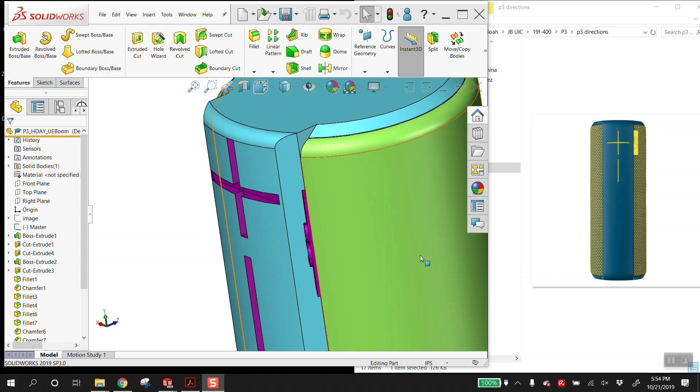Cool. Pressing questions? None too much. I'm still working on certain aspects of it.

I was wondering, do I need to render the features on the top and the bottom if they're not going to be shown in the photo? Nope, you only need to build what's visible here.

So then I started this, which is my theoretical redesign. This is what I was thinking, like a candle mug, a travel coffee mug. I'm not quite sure if I'm super happy with it yet.

Part of me thinks it needs to get cut in half because I feel like it's too much.

This is what I have in two shots. That's looking great. But technically the fabric, I can't find a cross fabric that comes at an angle so far. You could rotate the angle in Photoshop, but looking at this image and what you have there, I think it's okay.

I think this is an illusion, like a diagonal aspect of it. I think you're all right. I would try and get...

That's looking pretty good. The problem is every time I render it, something's off and I can't figure it out yet. But it's okay, I'm still working on it.

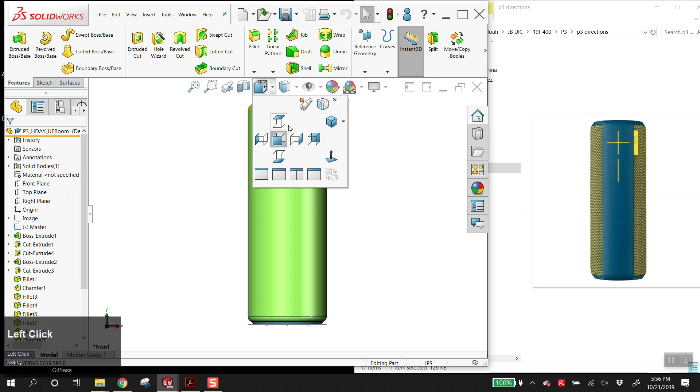How did you build this? So there might be a very simple way to get rid of it. Let's see if we can figure that out. Or would you prefer I not invest time in that?

No, that's okay, that's good. It's the little things that start to evade me. So you know what, I see this now.

So you got a chamfer there. What happens if you just simply select this as a chamfer too? Oh okay, it's fine.

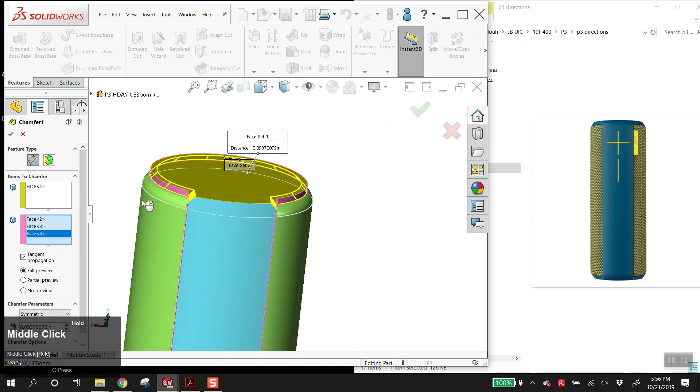There you go, just do that. Perfect, let's see now how it rebuilds, and I can talk and let you know exactly what it is that I did. Let's see, does this chamfer rebuild? That looks a bit funny, but you might be able to just simply throw a fillet on here.

I would... okay, maybe you do this already. Do you cut and mirror it at some point?

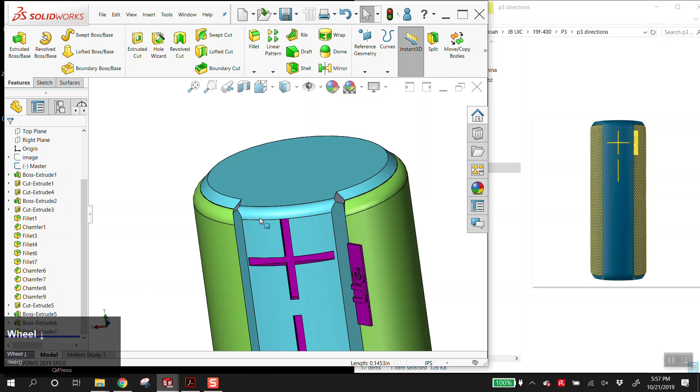You know, in theory, this would be better built in half because you don't have to do all these things twice. I'm probably going to take off some points for that. It's up to you whether it's worth it to go back and change that or not.

I'd have to go back and watch your video. I'm not sure I have a full understanding of that.

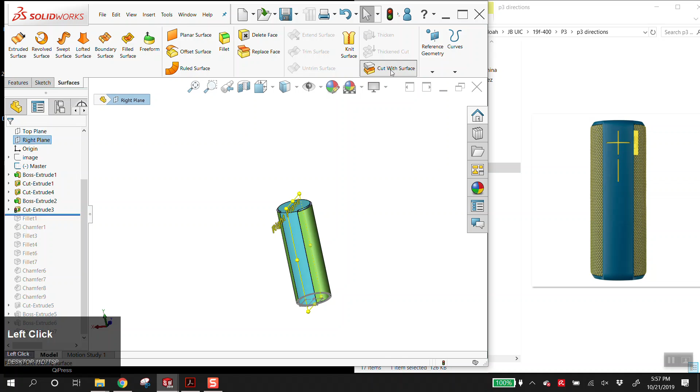Simply, one simple way you could do it would be, before you start applying fillets and stuff, you could simply go to the right plane, surfaces, and say cut with surface. Blow away the left side.

Now here, all of your fillets and stuff, in theory there's less to select, but mainly it's for this top portion. Because now when you get this chamfer, when you fillet this out, you only have to worry about it once.

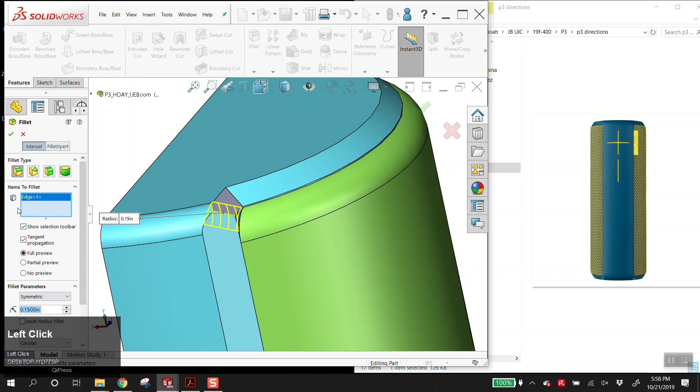I'll be honest, it's kind of nitpicky, but it's all in the name of giving you best habits and best practices. That's fair.

This is a bit wonky, but hopefully it doesn't come through in the render. You should be able to let most of this rebuild, and you simply just at the very end take the right plane and say mirror, then just select the bodies one at a time.

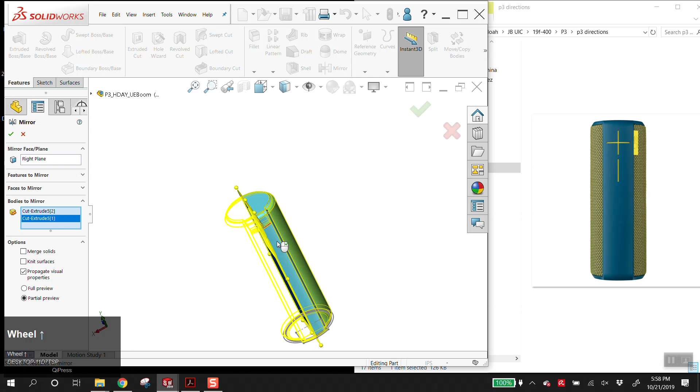I just feel it's my due diligence, checking this to let you know where you might lose points. It's your decision whether it's worth it or not. You may not care, and honestly, in the grand scheme of things, it may not matter.

You should know, at the high grade right now it's going to be a fraction of a point. It adds up, but you can determine whether it's worth that effort to make up. But basically, you can just do what I did, and again, hopefully this records.

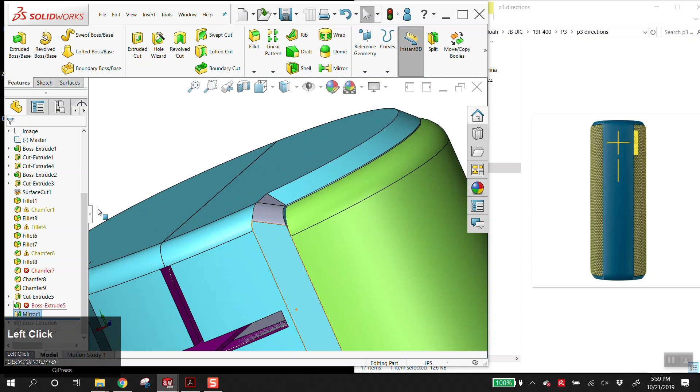So I think the main thing that we started down this path for is that in this chamfer command, if you simply select these faces here. Originally, you didn't have this face selected, so it only chamfers there.

If you simply add this face to the selection, it just turns it, and that will get rid of that point in your render.

Yeah, the texture you might just play in Keyshot with it, making it a bit smaller. I don't know, but it also looks all right. I don't know, it's your judgment. I guess I'm picking up on you saying some of the things looked a bit off, and that's what I'm picking up on.

The other thing is this is like a silicone material, but when I use the silicone materials we have in here, it doesn't look right. This is right now a paint material, and it's too shiny. So then I changed it to plastic, but it still comes out wrong because silicone is like a matte looking material.

So here's what I would recommend. Click on materials here, expand plastic, and select rough plastic, or click soft and use that kind of plastic. Maybe like soft blue or anything, since you can change the color, and drag that over. This even applies almost like a fuzziness to it.

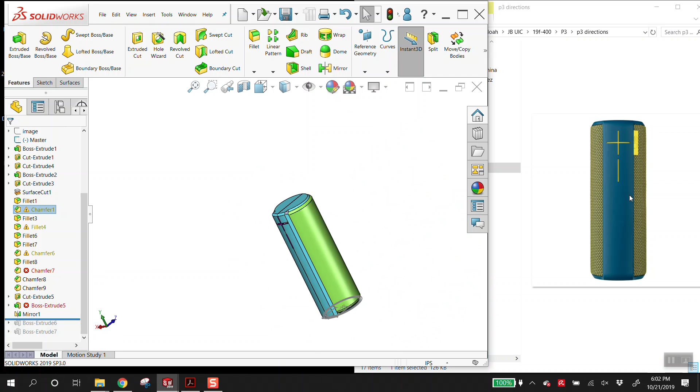And if I look at these two right now, your plus looks a little too high. Yeah, I just noticed that when I was looking at it. I also noticed it's too wide - it looks like it's touching the edges, and it shouldn't touch the edges.

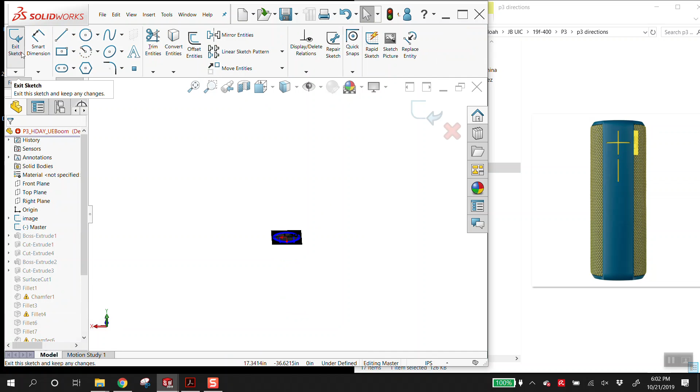Do you have this photo in here? I thought I did, yeah. Oh no, you know what the photo is? No, the photo is on the top view. That's how I started. I would get this photo in there and just literally trace it. Okay, that's fair. And that'll get you the plus shape.

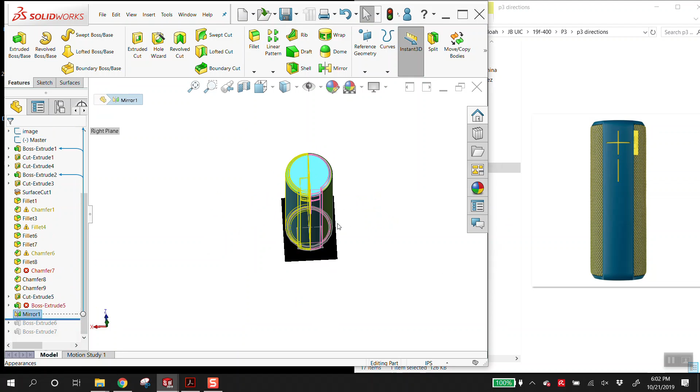Master looks good. Any other questions? You have the last question time or something. I felt pretty good about it this weekend, I worked a lot to get it pretty close. Okay, I think you're in good shape.

Looking at your coffee mug, I might just say maybe the handle doesn't go all the way down - maybe look at it just stopping higher up, and put some generous fillets on the inside so it looks soft. I also thought about cutting it in half, so it's only like a half handle, like the handle you did on the toaster, so that it has the illusion of a whole line.

If you do the half handle, please just terminate the handle better. Your toaster is great, but just put giant fillets on this. Okay, I will. Cool, all right, nice work.

Do you want to skip? I haven't been asking this - I went and did a couple other ideas, and then this is what the original was. Okay, that's cool, you're good.

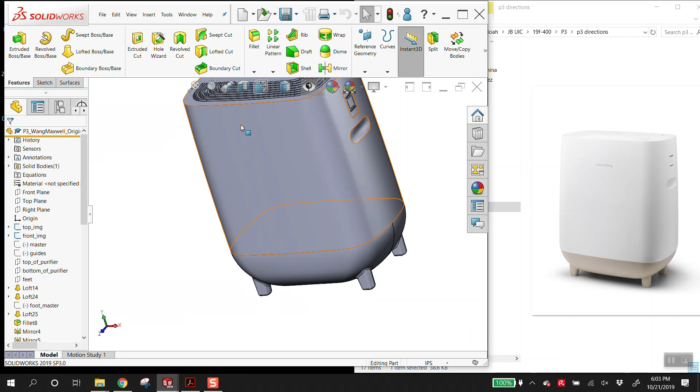Oh yeah, let me address that. You're absolutely right, I apologize. I told you to do the cut, and you're right that it should be the extrusion because the cut varies in thickness, the extrusion doesn't.

I happened to be talking to my mentor the same day, and he was walking me through it. He thought of something: the grill is actually the same size, so you don't have to worry about the non-concentric circles. I did it manually by hand, obviously, because they're still not perfect, but it looks good.

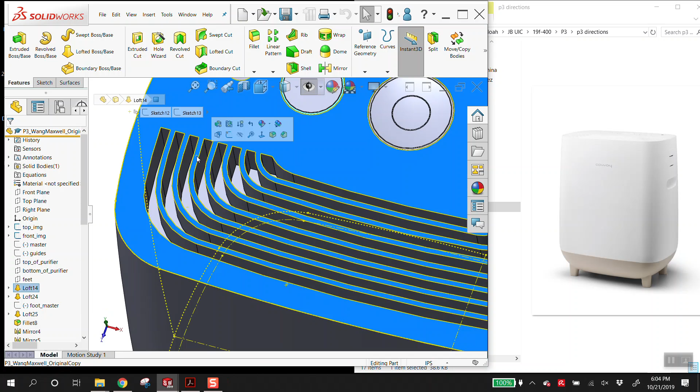I realized after I turned this in that I missed every single split line on the whole thing. So I've gone back, and this is now me splitting and combining every single face to create the lids and split lines.

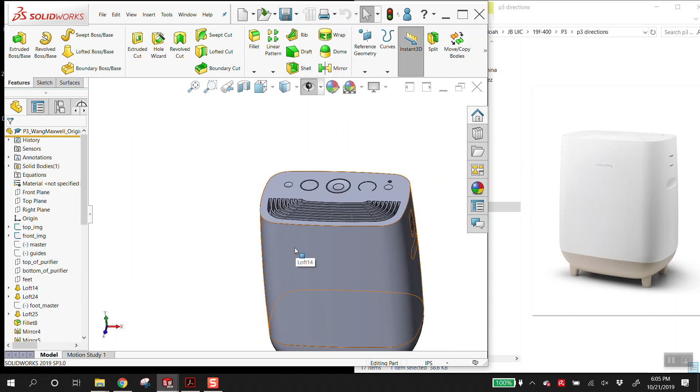That's okay, I think I see what you're saying. Since in the original image I realized this is the one I'm copying, you can still see there's a split line there. So where are you doing that then?

I don't understand why you're doing combine though, that's what's confusing me. I have to make it - I split it, so I made an inside and an outside. I made a shell and then used the shell, copied it, and cut the original from the shell. So the original is now the shell minus.

I understand - so you copy the body, you shell it, you do a combined subtraction to get the smaller one. And I keep a copy of the shell to keep the same functionality. That's cool, that's a good workaround. Then I cut with planes and lines I drew myself, and the combination now is also... that's weird.

Oh, see, I'm running into the inner body. I think I'm gonna end up just cutting the inner body right here, leaving just a little bit of the inner body for the underneath. Since from the top it looks like this, but I don't need this.

No you don't, and this little bit, there's a hole there, so I'm just gonna cut this here. That's fine. So right now all the combination is me recombining the halves back together to create this shape that doesn't have a split down the middle.

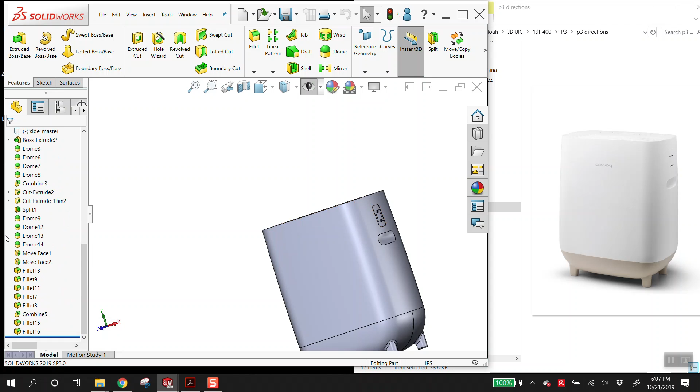Let's look at it here. Pinching is the issue I'm having with domes. Yeah, domes are not perfect. It's slightly better on that one, but I think on this one, because of multiple splits and multiple combinations, it's less perfect.

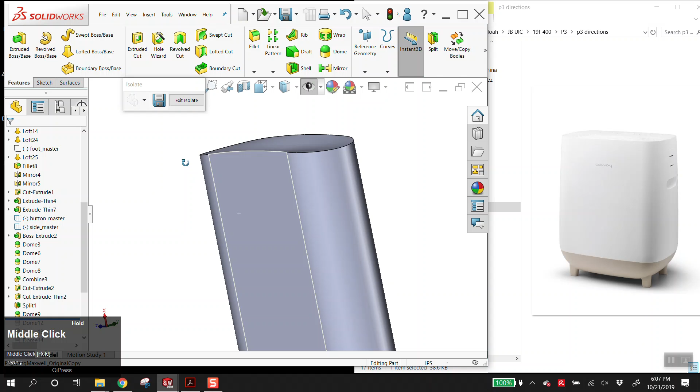On that one it seems to be working a lot better. Yeah, so here's this one - you did the dome right, because you want a dome on a body that's like this, where it's exactly this is the edge. If you have a split line, it keeps the dome more gentle.

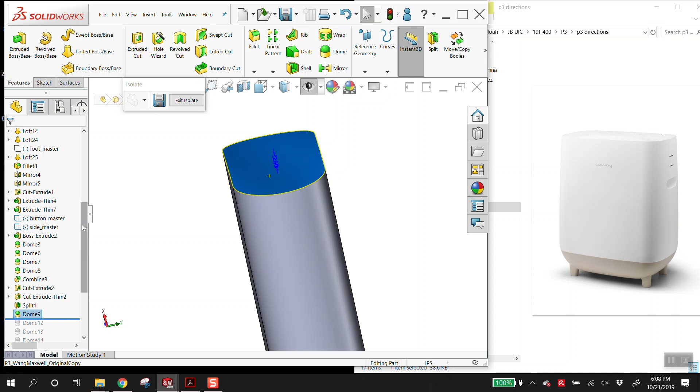So how did you do it? Can we roll back to where you did the dome on this one? Because if you did it on a split line, it's going to make it soft like it is on this one currently. So do me a favor, right click on this button and go to isolate. Okay, and now edit the dome feature.

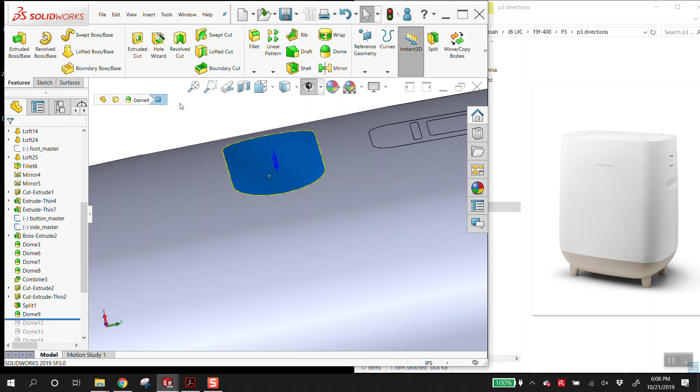So if you want, do you want to spend time on this? I can show you how to make this beautiful.

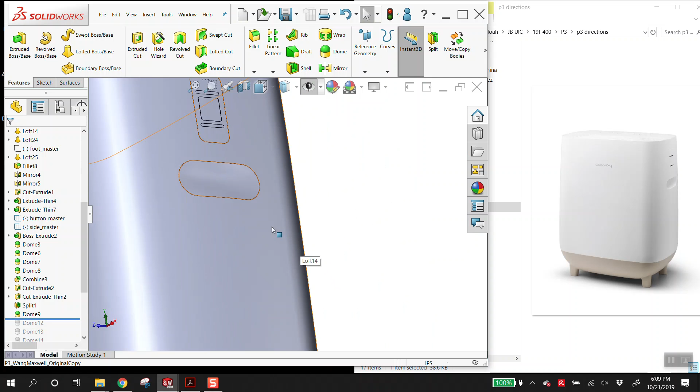Are you gonna use surfaces? Yeah, surfacing. Now, if you don't want to spend time on it, honestly, the dome's probably fine. I don't think it's going to kill it. It looks better here for some reason, I don't know why. It's pinching. Before it didn't pinch, and now it's pinching. I can't really tell, the only difference I can perceive is that this one is longer and this one is shorter.

So if you simply just, well, you could go to move face here. I use move face to make it. So just make it way longer and see if that fixes it. But I'll be honest, I don't know if it will.

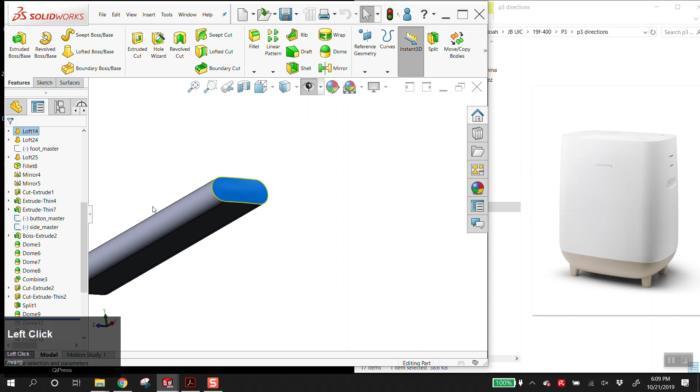Oh, now it broke. What is this here? Did not seem to help. Is it better? It's slightly better, it's slightly better.

Let's see if there's a quick fix here. Again, let me know if this is where you want to spend your time. You have 2 minutes left. Oh, I mean, I'm happy to. I want you to be aware of it though.

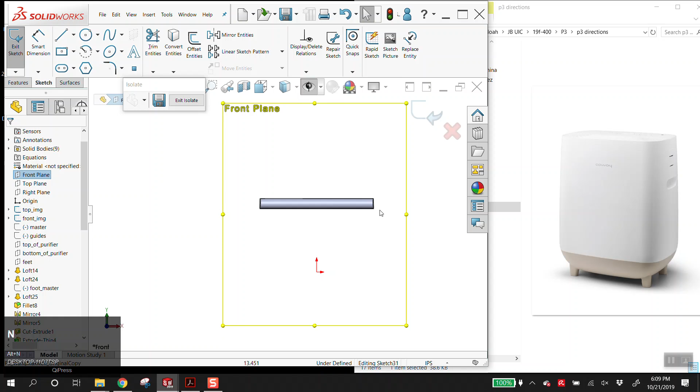Okay, can we move on? Yeah, we can move on. Alright, I'm gonna open P3 for just a second. I'm going to just talk about it while you do that.

You could try to create a sketch on the front plane that's an arc here, and in the dome, see it. I'm not sure if this will work, but you can try and select one of these here, and it might guide it.

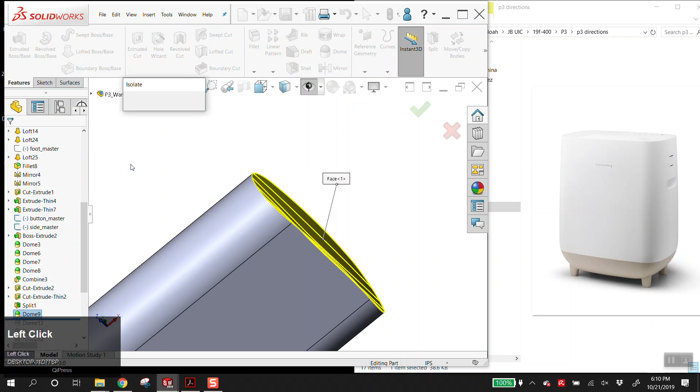But honestly, it's fine, it should still look good. Like test. And so that was what I had originally without all the splits. Okay, that's the original, yeah.

Is that not close? Oh, in the setup? Yeah. Is it not like... I couldn't get it. It looks close to me. Is that close enough for the class, for the project?

Here, hide it again. Show it again. It's like slightly taller. It feels slightly taller. You can go to camera here.

Have you played with field of view? I max out perspective, so when I shrink it, it goes even wonkier. It becomes like, okay, it becomes completely not right.

Yeah, it looks like we see more in the view. I don't know why we're able to see such an almost isometric, but also not isometric view. I don't know how to explain this view, but it's weirdly isometric.

I mean, some of the stuff you can do is just literally cut the top if it's looking tall. Just change your master sketch and make it a half inch shorter.

But yeah, I mean, you're absolutely right, you're playing with the camera focal length. You might be able to play with field of view.

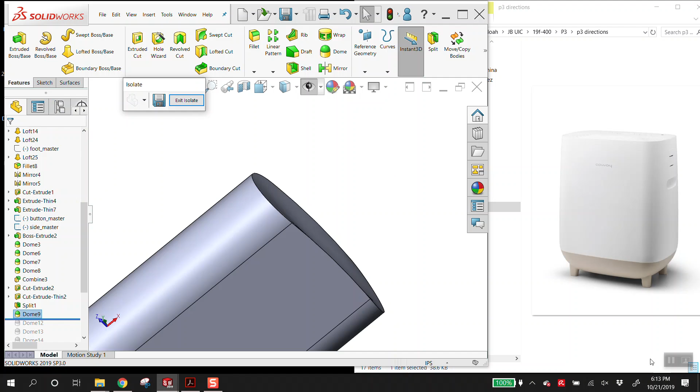Okay, cool, nice. All right, stop your time. Do you have any pressing questions?

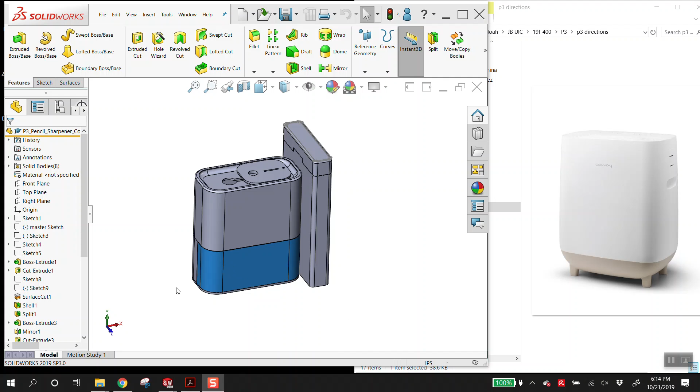Okay, we can talk about Keyshot on your computer then. That's fine, because I did a test run here, and I see that if you take that here, it will show up. Okay, so I don't know how to fix that. So you're saying down here.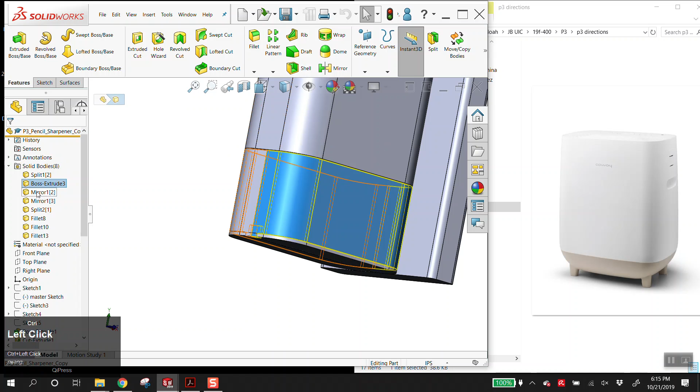Firstly, off the bat, I can see in SolidWorks, is this file what's there? Yeah, I think firstly in SolidWorks you want to combine these two. So you want to take this and hit combine to make it into one body, and hopefully that will get rid of this split line in the middle. Do you see that? Yeah.

Again, with what I just showed, you should be able to, if it's the same file name, make that change and go into Keyshot, say import, and say replace geometry, and it should keep the materials. Does that make sense? Now let me pull this up here.

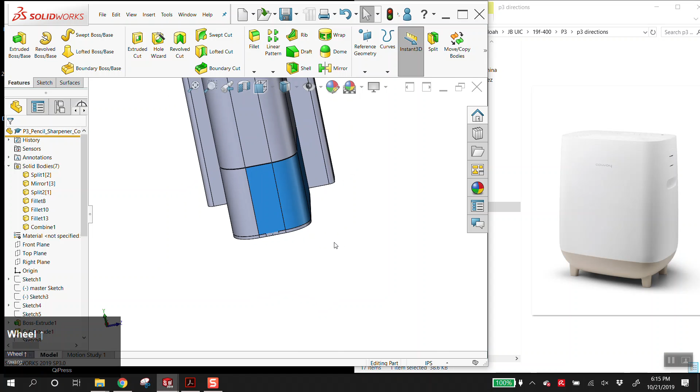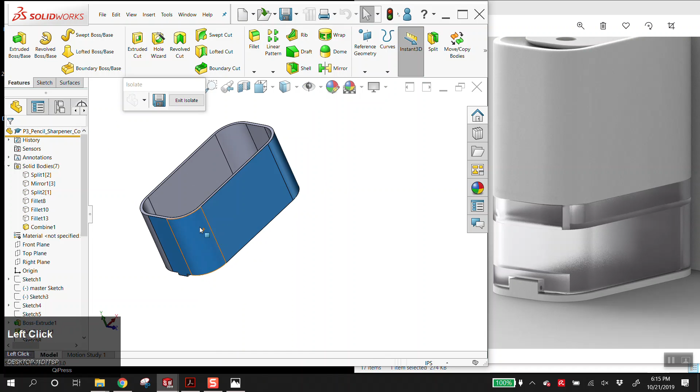All right, so let's look at this. I know, don't worry, I'm happy to look at that there. Okay, you did this as a shell, that's okay. What material did you apply to this?

Yes, so let's go — do you have Keyshot open? Let's look at your material options. So I would go to see — is there? I might look at glass, and actually expand the glass there, and select solid glass actually.

And is one of these frosted? No, click on frosted. I would pick this one. I would try that one.

And I think that's going to — if we look here and those shadows that are forming here — I mean, I know your poor computer is asking it to refract everything, but that's my best advice: that line in the middle is happening because they're not combined. So combining it, like I just showed you here in SolidWorks, will help.

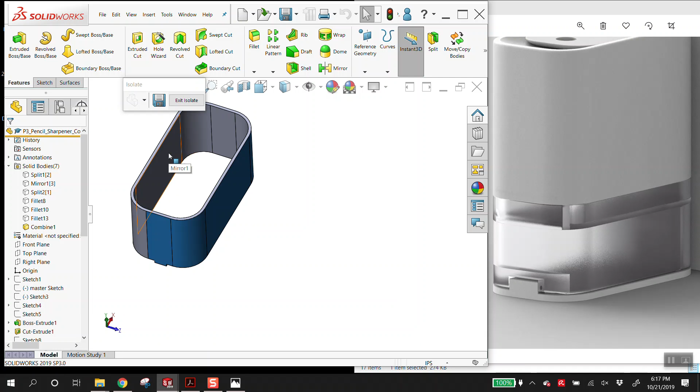The other thing you could try if you're still having trouble is not shelling this. Let's see how you built this. Yeah, it's just simply suppressing the shell command, and as a complete solid it might render a little bit darker.

But actually, you see how what that's looking like and what this is looking like? Is that answering your question? Is that kind of your goal?

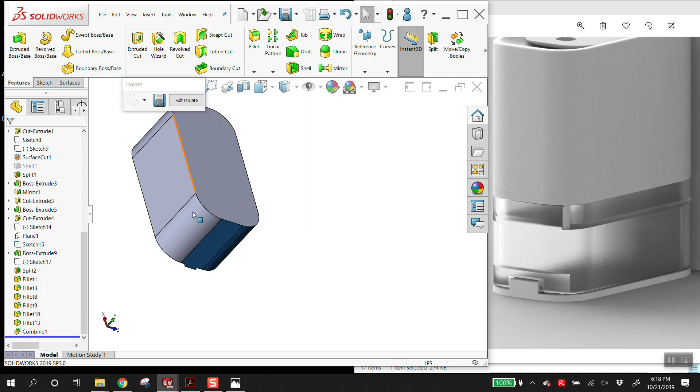Oh, down in here, okay, I'm sorry. Okay, sorry, I apologize, I misunderstood you.

Well, okay, if we look at how you built this here, this is going the wrong way. You see how this jumps up? So let's roll back through here. I'm sorry, I misunderstood you.

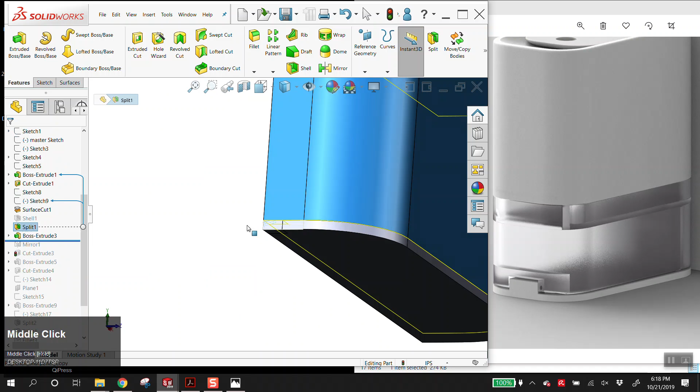All right, so you split this on the side — that makes sense, I'm assuming, yeah, that's cool. So this extrusion here, you got to fix this in CAD. So I would edit this.

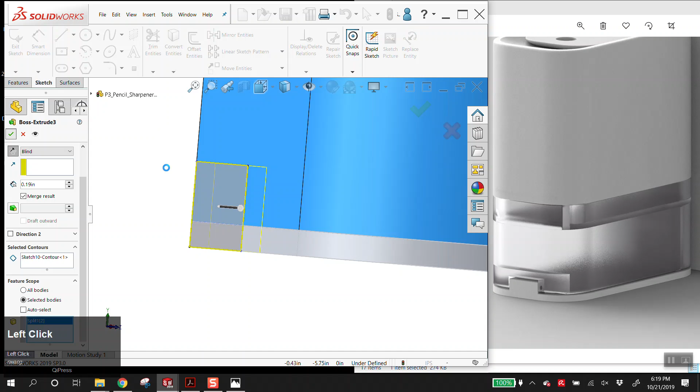Okay, that's cool. What you have to change here is where, in feature scope, selected bodies, it's going to the wrong one. So right click here and set clear selections. I'm sorry, it's covered by my thing here. But in here, you want to select the base, because right, it's part of the base. And then click check, and now it comes up.

And now in this view, same — let's see, where did you make this sketch? It's on — is it on a face? You could simply select this face again and hit Alt S, select a sketch, and say convert entities.

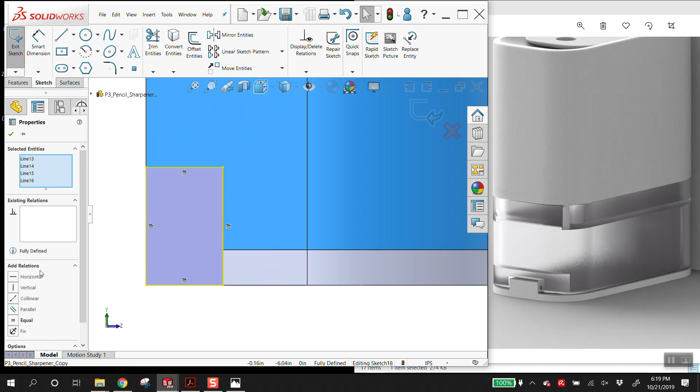But you know what, you actually want it to be a bit bigger because there's a gap in here. So I'm going to set this to for construction, and I'm going to say offset, and maybe like 0.01, maybe a bit bigger, 0.02. Click check. Now here I'm simply going to say extrude cut.

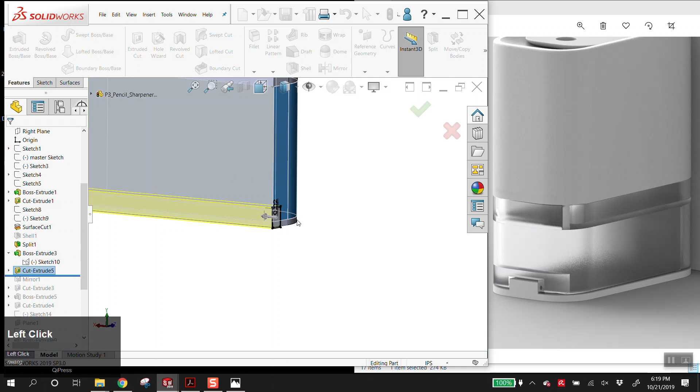And here say through all, and select this. And now there's that gap in there, which is going to match this. So basically you just got to get your details right. And then obviously this should not be the same here.

Cool, does that make sense? So you just — I think you just had the wrong body combined with this, and you just need to make those changes. Again, it's recorded, so hopefully you can go back and refer.

You still have 2 minutes. What other questions do you have?

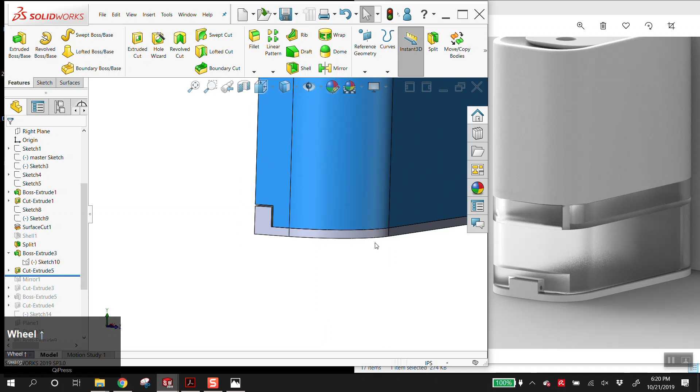I feel like I don't know if I should change it because it looks much smoother. Okay, agreed. And this one kind of looks like actually, so the top part, I'm okay with this. If you want to make it smoother, you should be able to just blow this out. It's okay to just have it go way big.

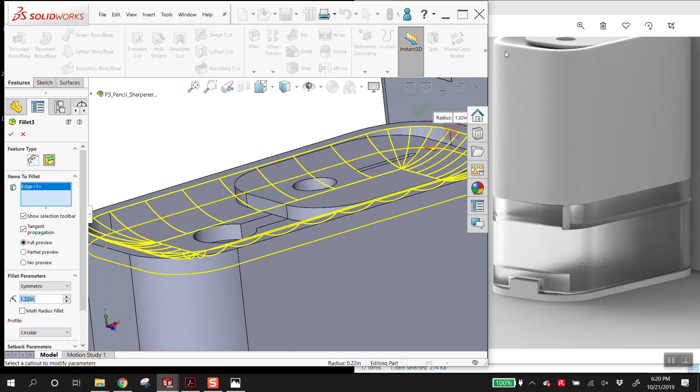And have the fillet come up. So that's up to you, you can change that if you want. My honest answer is I think you're pretty close. The one that I think you want to blow out is this one, because this thickness here.

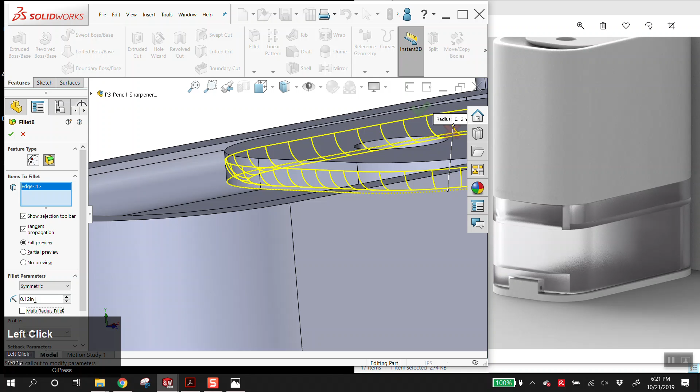You see how this comes almost to a point. So I would definitely edit this fillet, and I would make this one bigger. I'd make this one like... I'd probably do that.

That looks more real to me. Also, this looks more forward. So you can simply take, I don't know how, where you built this, but you can simply use this tool, select this, and just slide it forward a bit. And just make sure you don't check copy because you don't want the...

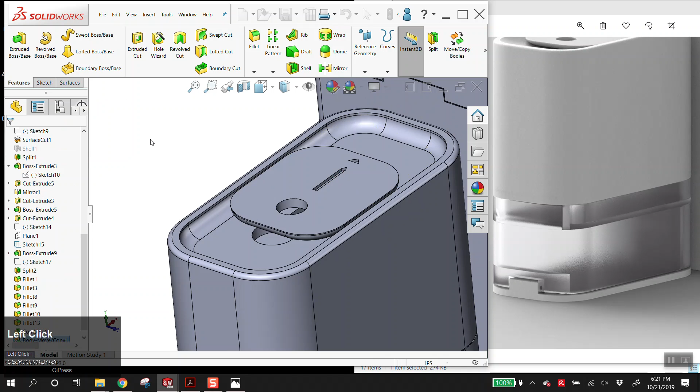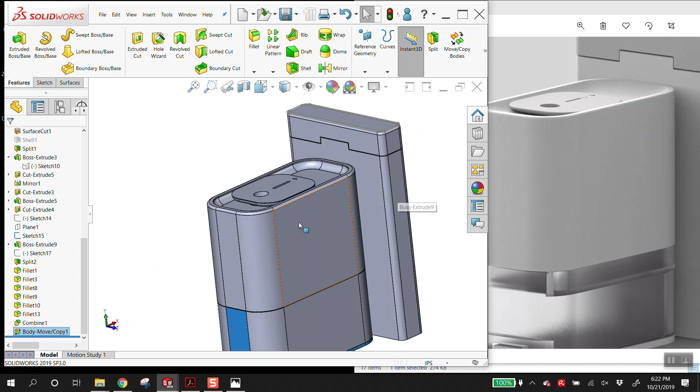Right? If we look at this, you see how forward that is? So I would definitely use the move body command and just slide that forward. I don't mind that you built it back. I think that's okay, you could argue it makes sense for the file. I'm assuming you're doing this view, right? Yeah. So I would definitely slide that forward.

You could, if you really want to, like take this and just... never mind. I was gonna say you could rotate it about the z-axis, and it looks to me like ever so slightly it's leaning up and this is down, but I could be wrong. The way you would do that is you go to the z-axis here, maybe just even half a degree.

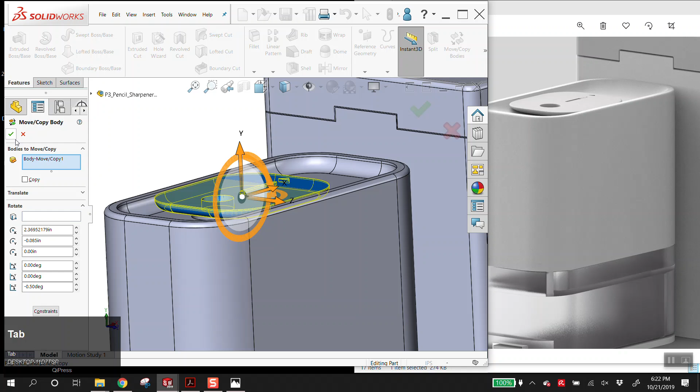Make sure you're going in the right direction though. I think it's negative half a degree. Again, make sure copy is not checked, and it's going to make it look like it's rotated up and the next one down a bit.

Any other questions? That's all? Okay, cool, it's looking good. Where are you going to go with it? I was thinking maybe like... or okay. Figure that out sooner than later. Make some sketches. Cool.

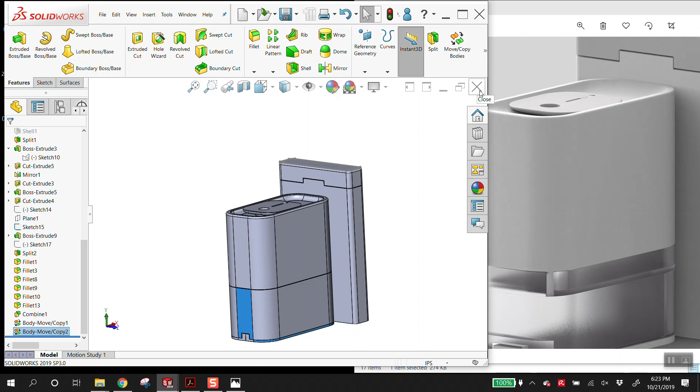And I can refer back to this. Alright, go ahead. Alright, so I mean, yeah, I'm not... the only thing I still haven't done is just bodies. Okay, and that's pretty much it. Oh, and it's still... yeah, that's pretty much it, that's easy.

It. Yeah, everything else. Oh, and this, I did this before, but you're welcome to do that in Keyshot. I give you permission to, if that's what you prefer. That might be better because I don't know, when I did it on this, it just got slow.

Okay, so the way that I would do it in Keyshot though is you're going to want a body behind it. So right click on this and just click on the eyeball so we hide it. Oh, it's all connected, that's fine. So show it again, I'm sorry, or you can Control Z, that might show it.

So what I would simply do is on the front plane or whatever, I would just revolve a cylinder, a bit smaller than this in here, as a separate body. Don't combine it. And when you bring it into Keyshot, it'll have that body in there. So when you apply...

The mesh to this face here, there will be something behind it. Because if you don't do that, the mesh will just look like it goes up there, it'll make it look like it just goes all the way through. Does that make sense? You want me to? A little bit, it's fine. I mean, I can show you on my screen here. I'm trying to avoid touching people's computers because I'm sick.

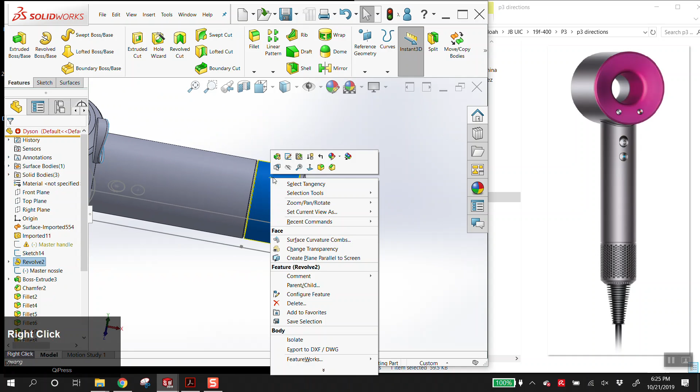I would just simply revolve a dummy body like this, and just go to features, just revolve, and uncheck merge results. And so just imagine that in Keyshot you're changing the transparency of this. Yeah, and so now you see that that body is right behind it. That's all I'm having you do.

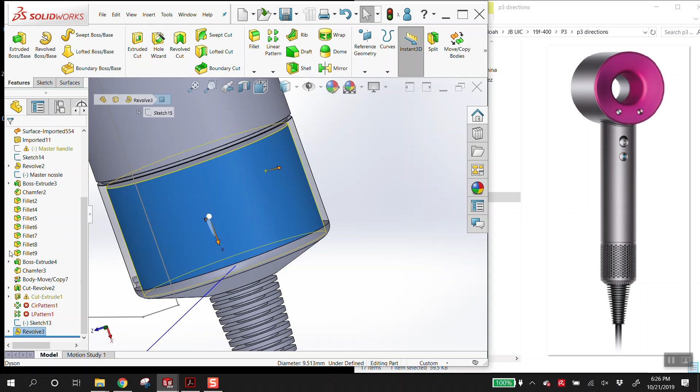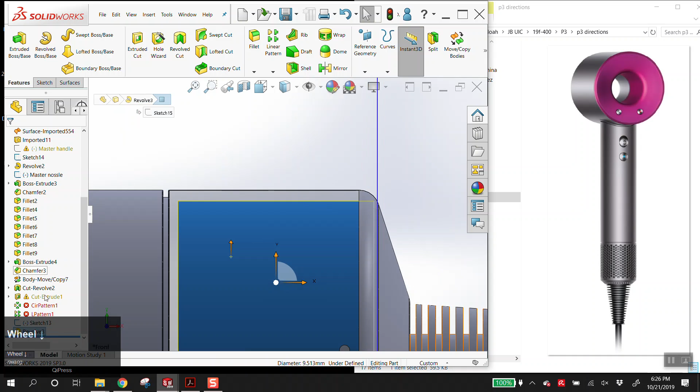Like show, well, because if I put it on that, like once it... I'm saying, so if you don't do this revolve that I did, then all of this dark in this image here, it's just going to be white. By doing this, this blue surface here becomes these dark aspects behind this mesh. Depending on how much smaller you make this, like if right now if we look at it, yeah, you would see white here.

So like if you don't want to see any white, I would... yeah, I'm getting lost in my own file here. I would, oh shoot, not edit feature, edit sketch. You know what I'm saying? I would take the sketch and just drag it.

Edit sketch. Just drag this higher up if you don't want to see as much white.

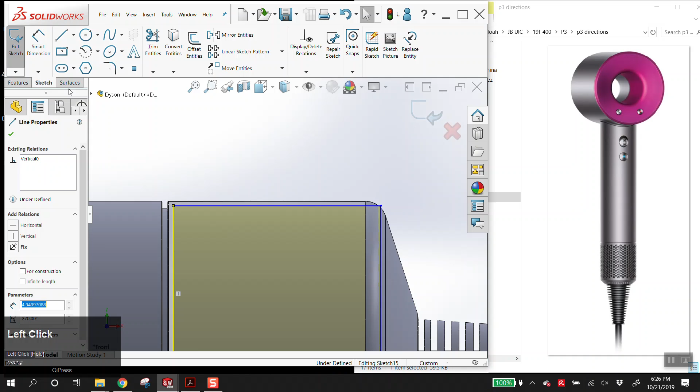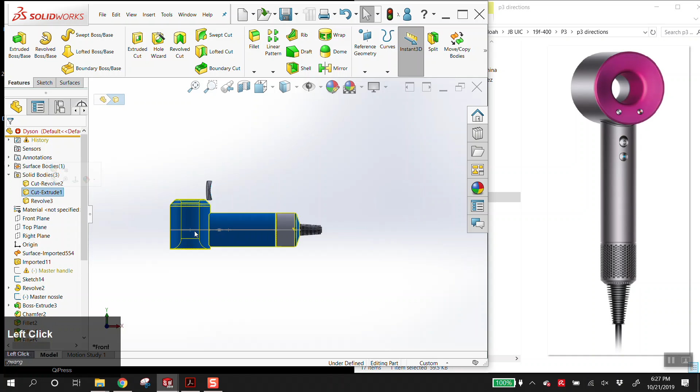Does that make sense? It makes me a little nervous that you have this all as one body in SolidWorks. At the very least, at the very end, you don't have to rebuild anything, but just split it with a couple cuts. So if we look at this right now, you have one solid body, maybe two in this one at least. But all of this being one solid body, what I would do at the very end, let's hide this one I just created.

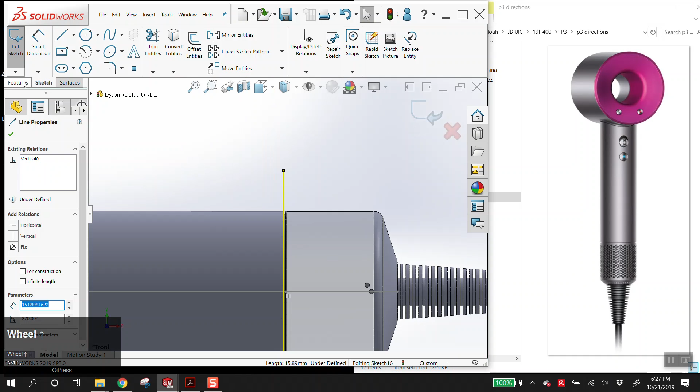I would create a sketch, like this is a part line here. I would create a sketch that aligns with either of these, doesn't matter which. Just drop it there, and simply go to Features and say Split. Select this thing. And then the way that you get this through here...

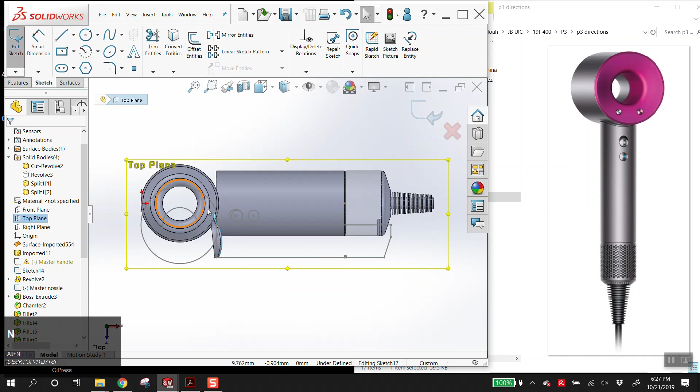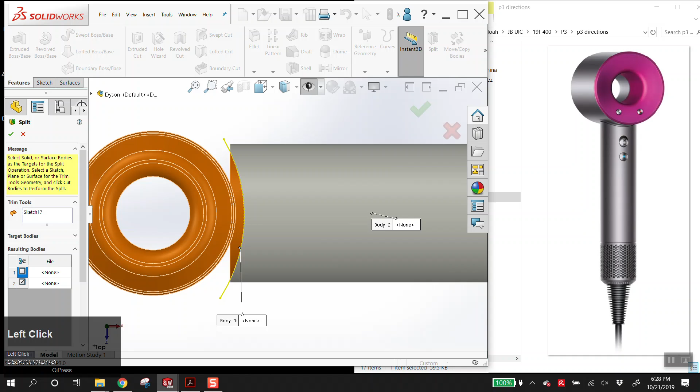Obviously I know you have it fixed in the new one. From this view, you can simply just, if you get an arc that's offset of this, same thing, you can hit Split and get it on this here. And that will give you this part line here.

But obviously that split should be an offset of this, I'm just roughing it in. That will also help for material application. I would also probably put a split around here for the pink, so you can simply split it from this vantage. You can split it along here.

Yeah, and then fillet the edge so it reads. But yeah, for sure on that one. And then when you extrude the buttons, make sure merge body is not checked, or merge result is unchecked.

Cool. How do I get this ring kind of effect? It's like an hourglass.

Dark and that's light. Do you have Keyshot open or no? There might be spun metal, that would be the material. Okay, because I tried making that.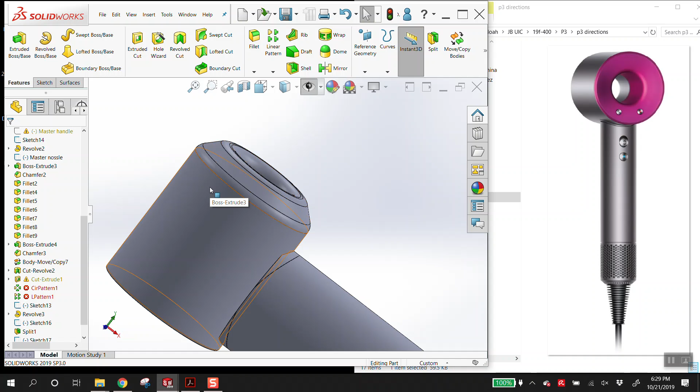You can also check, you could probably do this too. You could totally come here, grab this, and apply it as a texture. That's what that is, right? Yeah, that's what that is. You might also be able to play with it with lighting, highlights and stuff.

Apparently it doesn't exist. Okay, if you expand the metal here, expand this one, go to maybe aluminum, I don't know, any brushed metal might give it to you. Texture, yeah, and look, or one of these say brush. There you go, brush 90 degrees, that one might give it to you.

Yeah, I mean it's not that, or yeah, this works. I like it, yeah, you can do that. What's going to be hard with this one though is matching this to whatever texture you have.

So you might want to, it might sound crazy, but you might want to take this and in Photoshop, leave the shadow, find one that's an hourglass. So here, this one's like an hourglass, and see if you can erase the white so it's just the shadows. You might be able to do that in Photoshop with selecting a color range and hitting delete, and then that way the true color of whatever your render is will come through.

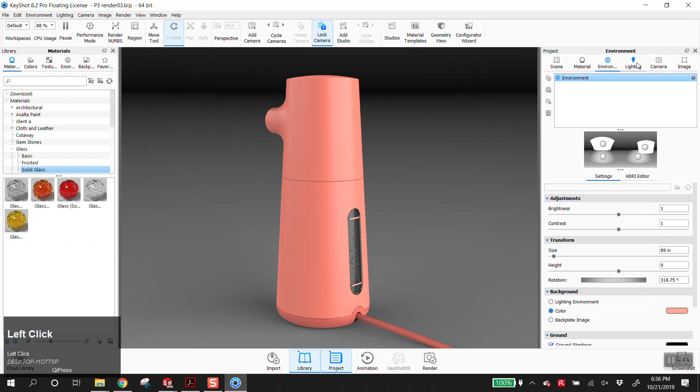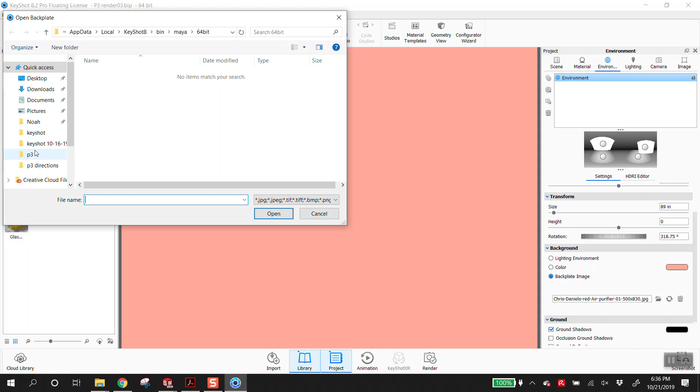I just want to remind you all of 2 things. For your backplate image, strongly recommend that you set the backplate image under environment to actually be the render that you're trying to copy, okay? So again, you go to environment, backplate image, go in here and yeah, I believe this is it. Select this, and set it. That way you can align your view, okay? So don't forget about that trick.

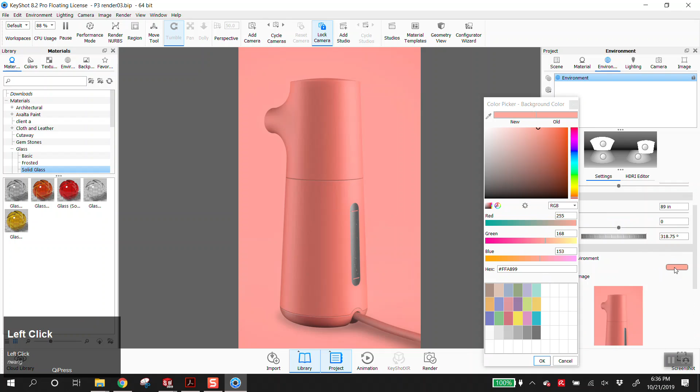You can also then, if you have a colored background like this, simply click in here, get the color selector, and simply copy it from, well, from the backplate image, hopefully. Okay, it's not letting me do that. But anyway, advice to get that in there.

Next advice would be, as you are setting up your image, once you have your camera set up, definitely hit that, add new camera. Once you get it matched to that image in your backplate, hit the lock so you don't actually accidentally move it.

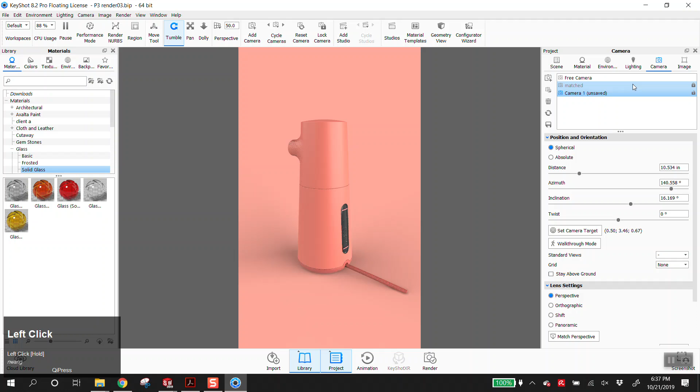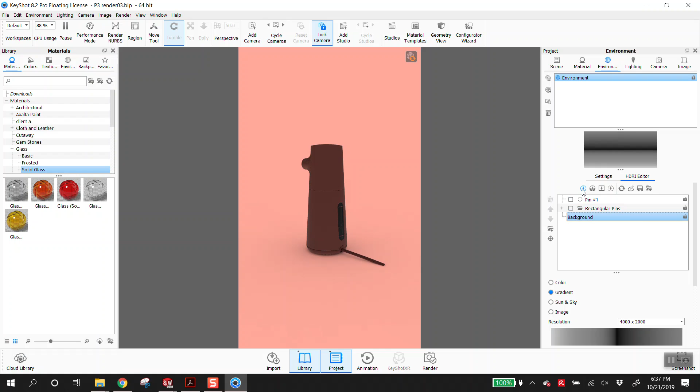The one last thing I just want to emphasize is now that you have your backplate image to refer to, please don't forget about HDRI editor and adding highlights here to match the exact highlights in your image. So for example, if all of these are turned off, remember that you can click on add pin and Ctrl plus left mouse button click to get a highlight.

If I want to highlight on that edge, I can click there. I can kind of move it, and then I can use my settings here to blow it out if I need that highlight to be greater or less. And just remember that that tool exists. That's going to be the quickest way, I think, to match the lighting of the render you're trying to match. Cool?

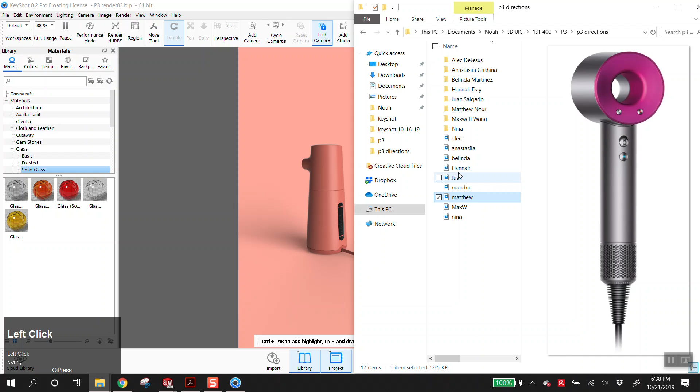If you're like Juan and you have your image here, has this like orange light here, I believe in these pins you can just double click this color, and I believe you could just set it to orange if you wanted that to match.